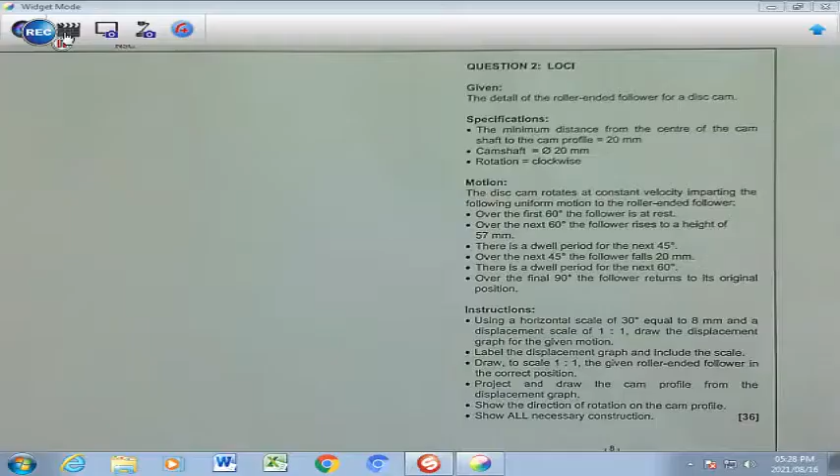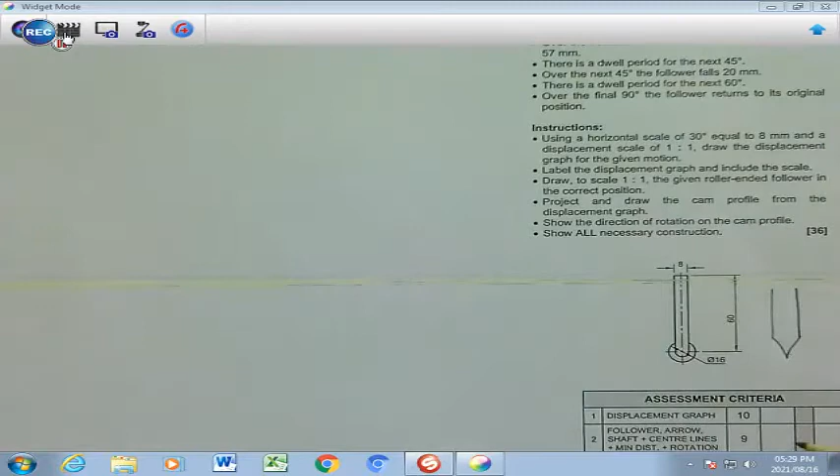So grade 12, we're starting with our first Loci Cam drawing, and this is cam number 1. So what is given to us is the detail of the roller follower, and I'm going to underline roller follower, and I want to take you down to the actual roller follower that you've seen. So we were previously exposed to sort of a wedge-ended follower, which was done in grade 11, but now we are busy with a wheel that's attached to this follower.

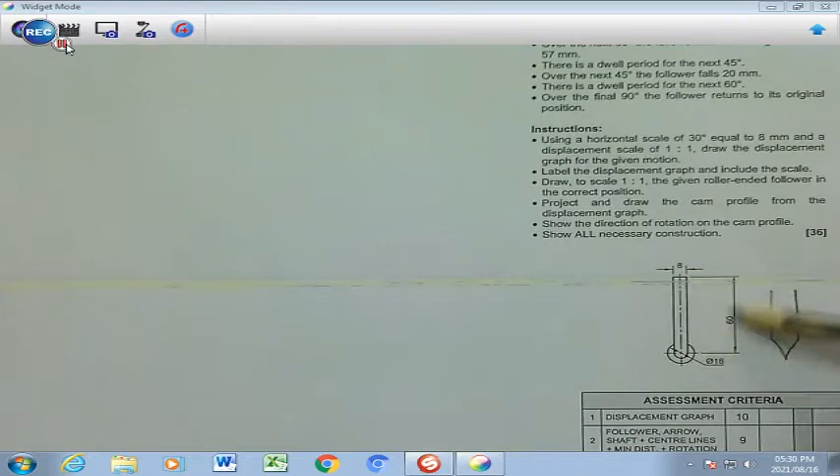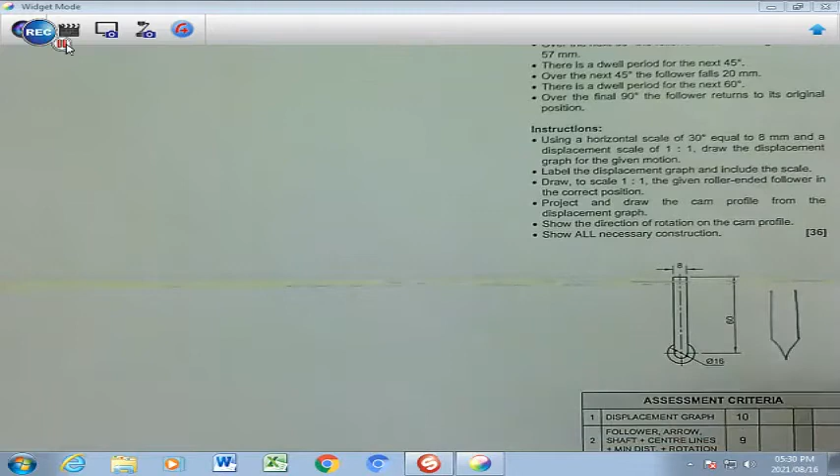So the first instruction is going to be to take all this information which you have here, the thickness of it, which is 8, the height of the follower, which is 60 from the center to the top, and the actual wheel that has a diameter of 16, is to basically redraw this as your starting point and your step 1 in your completion of the cam drawing.

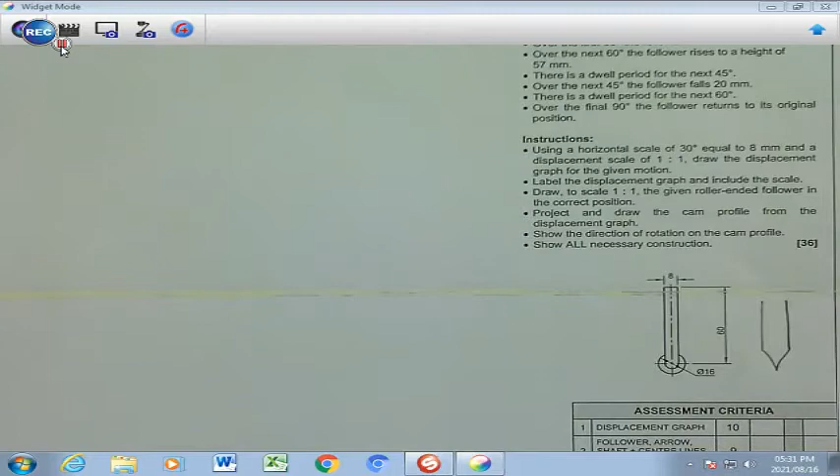So what you are going to do is basically to find the center of the page and to move slightly off center, which I'm going to show you exactly where to start. And to give it a broad explanation, I'm also going to just sketch it for you, and then I'm going to do it with drawing equipment. So as I mentioned, this is your half vertically, and then this is your half horizontally.

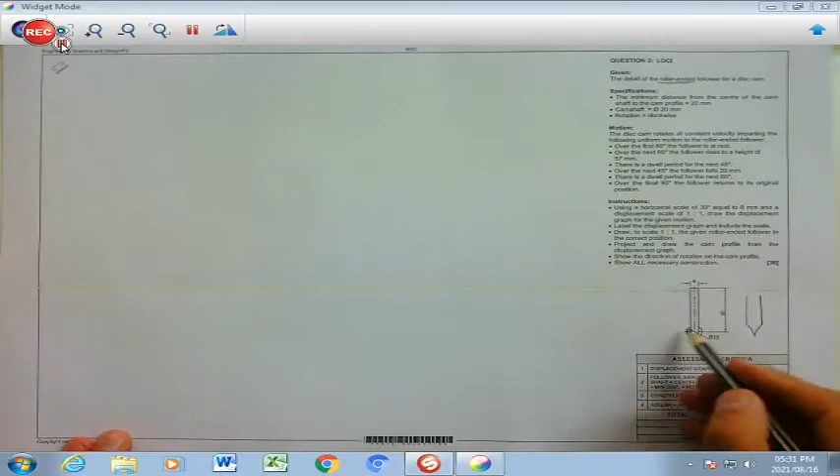So basically I'm going to take that information and start around about here, where I'm going to draw my circle, which is 16 diameter in my center, and then I'm going to draw basically a line in the middle here and measure off 4 and 4 on both sides, which is going to be like that there, and then I'm going to put that semicircle in there and cut that off at 60, and then I'm going to darken that completely like that, and that's my first part which I'm going to draw around that sort of center which we have there. So if you can draw that as step 1, let's do that first.

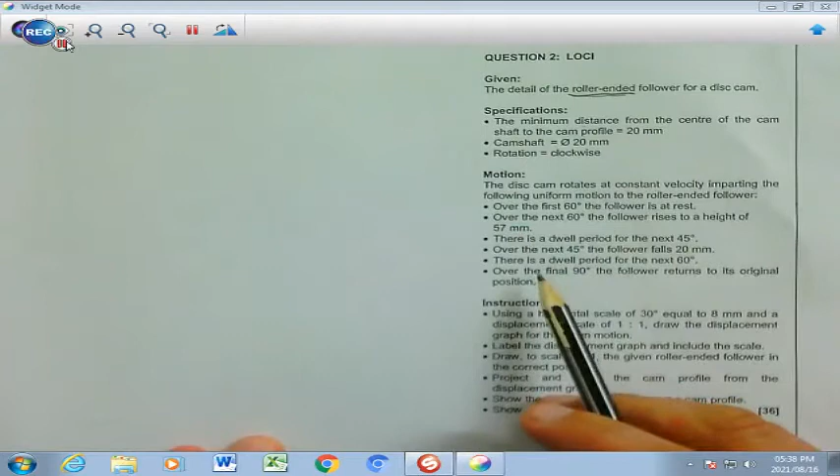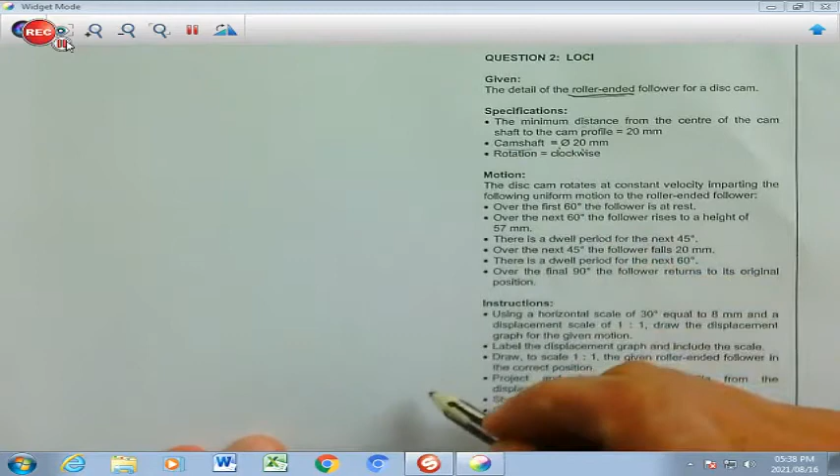Now we're going to look at the specifications, and they ask that the minimum distance from the center of the cam shaft to the cam profile should be 20 millimeters. The cam shaft itself must be 20 millimeters in diameter, and the rotation will be clockwise. So basically what that means, the minimum distance, so if you go over to your sketch, from this bottom part of the roller follower, you are going to measure down 20 millimeters, and then of course that point is where you're going to create your entire center, and everything is going to revolve around that specific point over there.

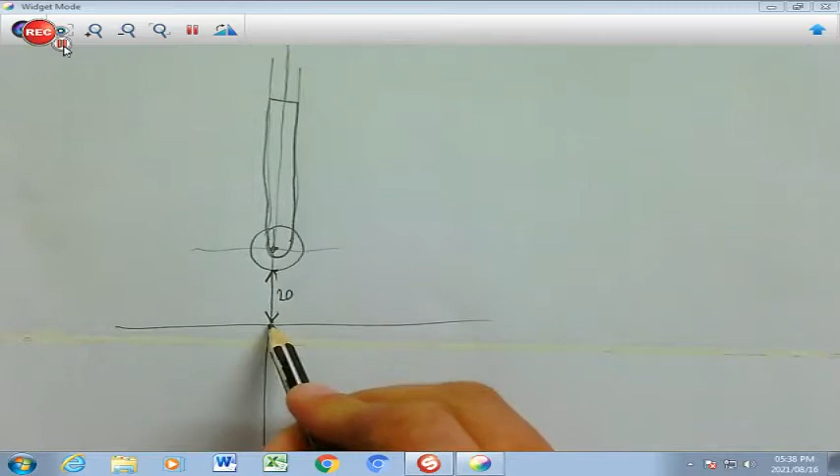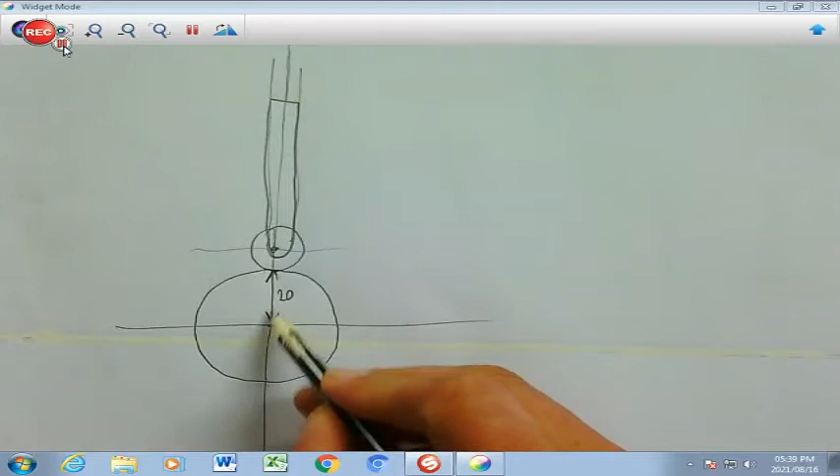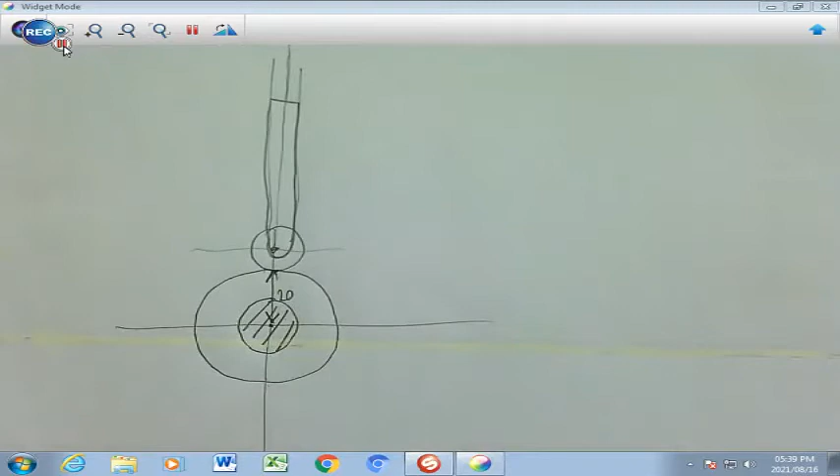And then you will take your compass from this point to that point and draw this minimum radius that you will see there, which is the minimum distance, radius of 20, but that would be 40 in total for your diameter. And then of course they speak about a cam shaft itself, and the cam shaft itself should be 20, so you're going to measure up 10, or you're going to take your circle template of 20 diameter to draw the cam shaft, and then you're going to hatch that part over there to indicate that that is the cam shaft. Let us do that quickly.

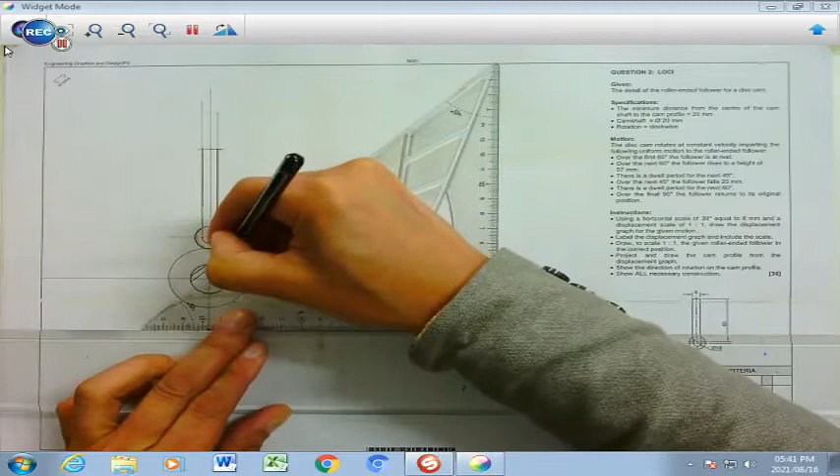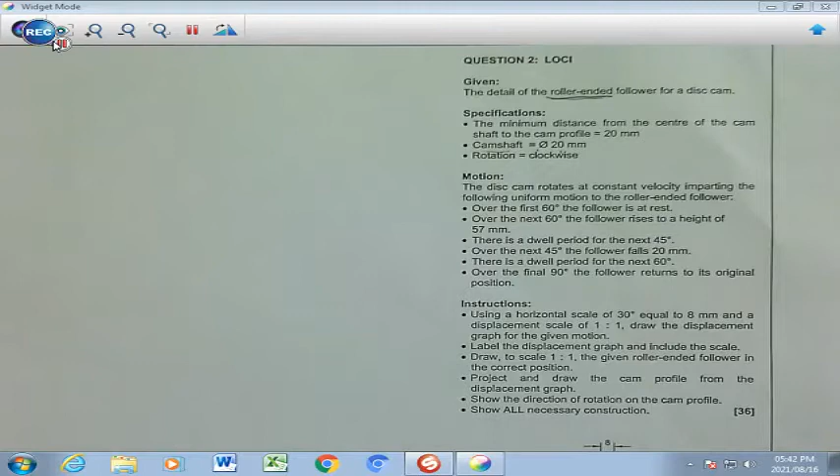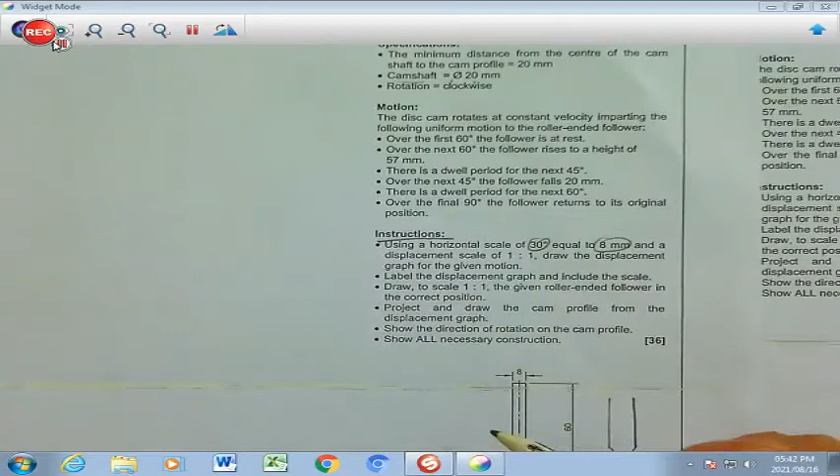So step 3 is where we are going to be working on our cam displacement graph, and we go directly to the instructions where it says that you need to have a horizontal scale which is along this side of 30 degrees equals 8 millimeters. That's very important, and your vertical scale is going to be 1:1. You need to label your displacement graph and include the scale. That's very important below the graph. And then you need to draw to scale 1:1 the given roller follower in the correct position, which we've done already.

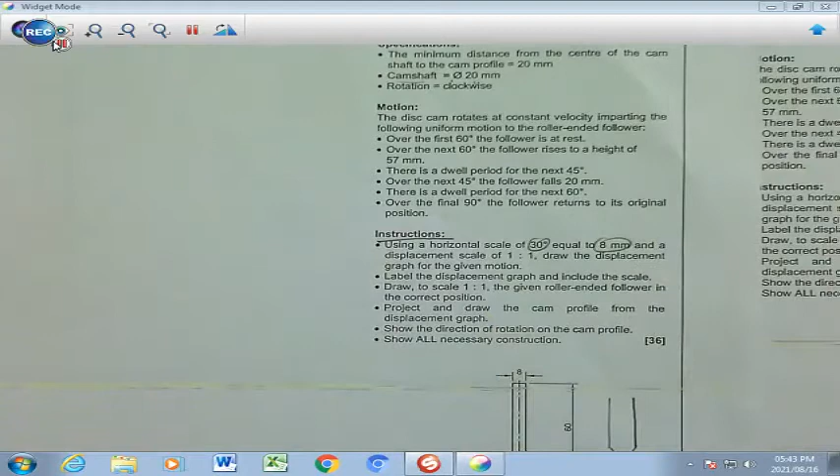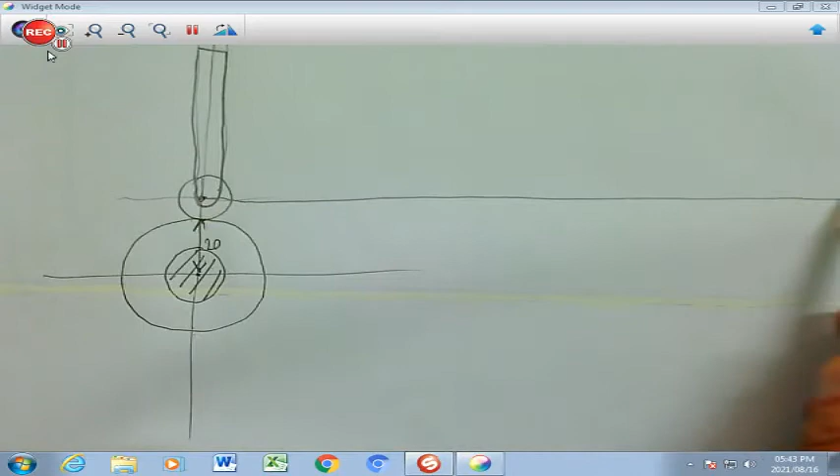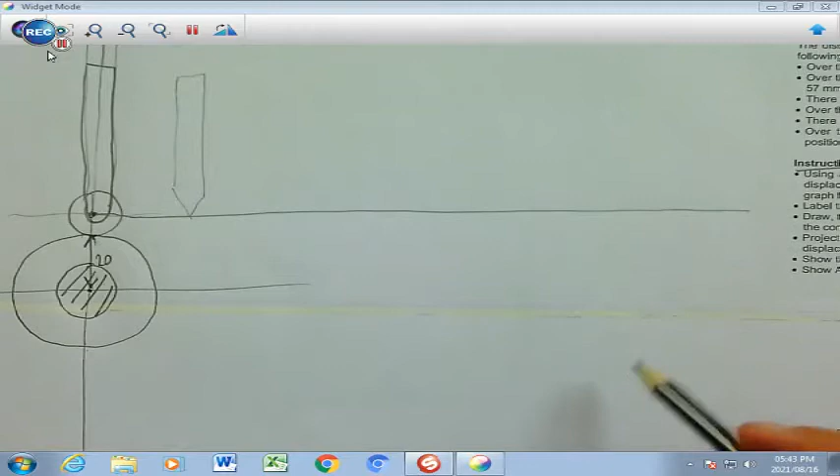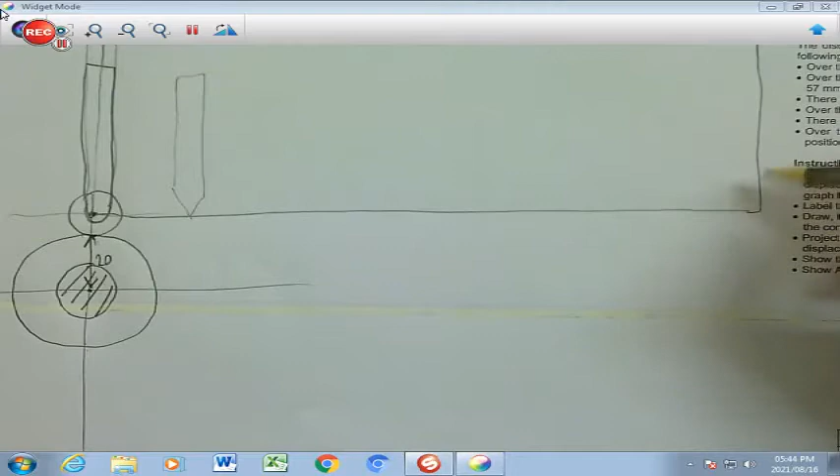So basic explanation, if you go back to your sketch, I'm going to draw a line which basically will derive from this center point here, which is going to form my base of my cam displacement graph. Previously we used to have the line drawn from the tip of the wedge-ended follower, but in this case it is going to be the center of the roller follower, where that becomes the base of your cam displacement graph. You're going to take it as far as possible close to the instructions, and then you're going to draw a line up which is basically perpendicular to this line, and that point there is going to be your 360 degrees.

And then you're going to measure from here 8 millimeters, because that's going to be your distance for 12 points on your displacement graph. I normally measure 1 point, and then I take my compass and open it up at 8, and I will have the respective points cut off on here. And there will be a number of points which I will have on here: 1, 2, 3, 4, 5, 6, 7, 8, 9, 10, 11, 12. There should be 12 gaps, and then I will project all my lines up like that there,

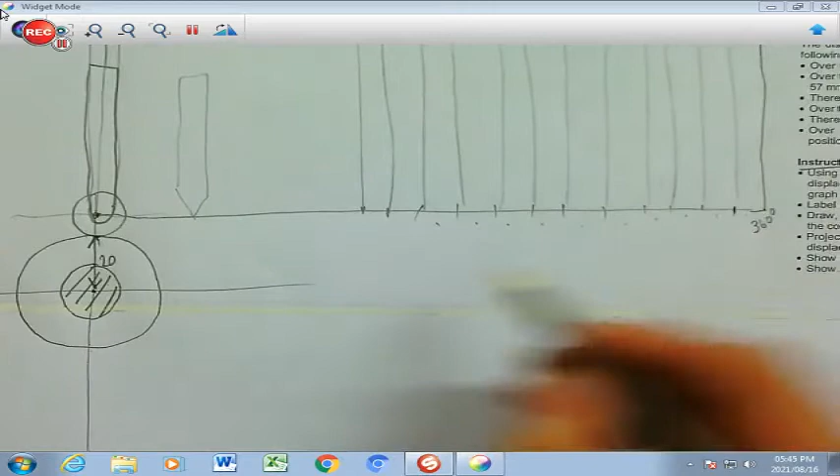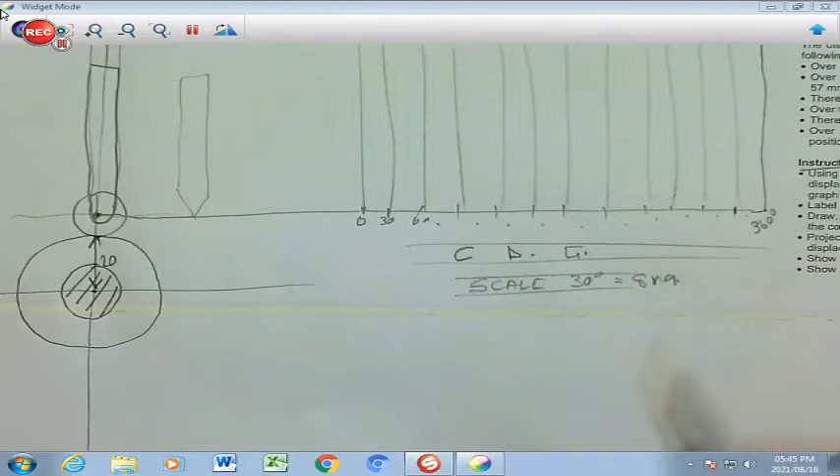vertically up, and then I'm going to label it 0, 30, 60 and so on until I get to 360, and below that I'm going to print cam displacement graph, and I will have the scale as well of 30 degrees equals 8 millimeters. So that's what I'm basically going to do with step 3.

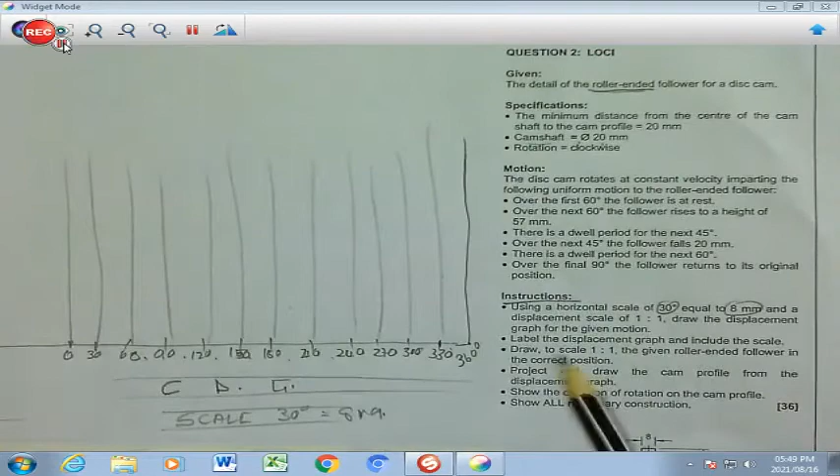So step 4, grade 12, is where we are going to plot the graph using the motion bulleted points here. And it says here that the disc cam rotates at constant velocity, imparting the following uniform motion. Now, very important, uniform motion means absolute straight lines, as you will see unfold in this graph.

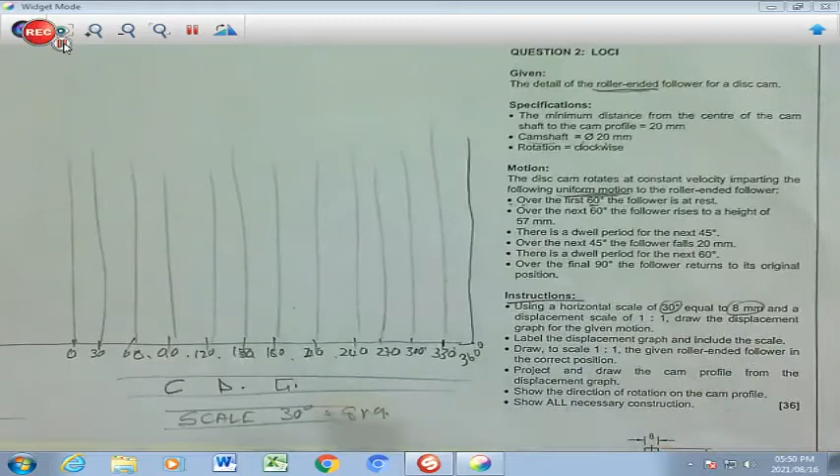If you look at the first bullet, over the first 60 degrees, the follower is at rest. So 30, 60, that means it starts here. You're going to draw a dark line from there to there. There's no movement up or down, it rests.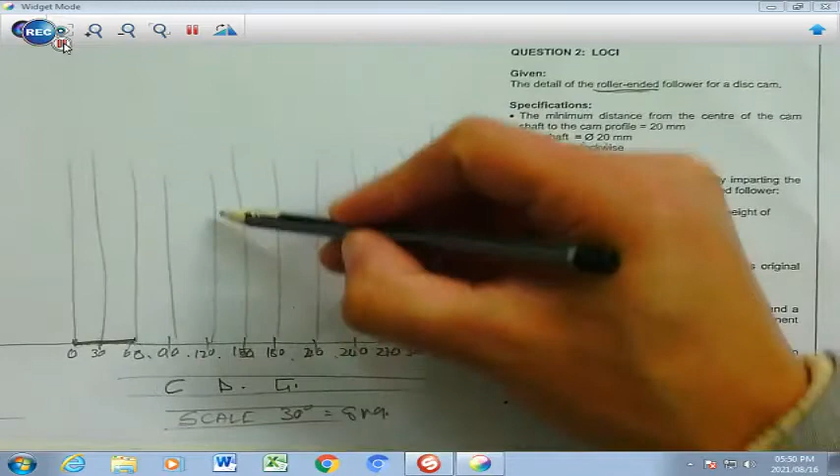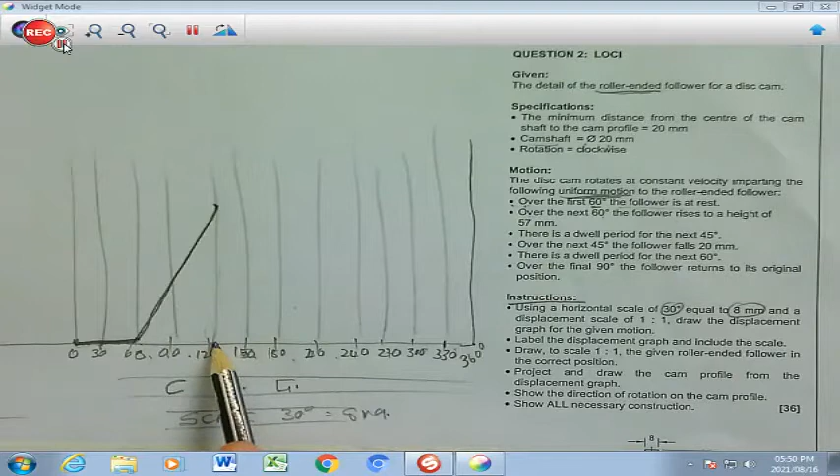Over the next 60, which is from 60, 90, 120, the follower rises to a height of 57. So for these two, it rises to 57. So you're going to measure up here 57. So for example, 57 is there. And it will jump up from this point right till there, which is the 57 point on that 120 degrees.

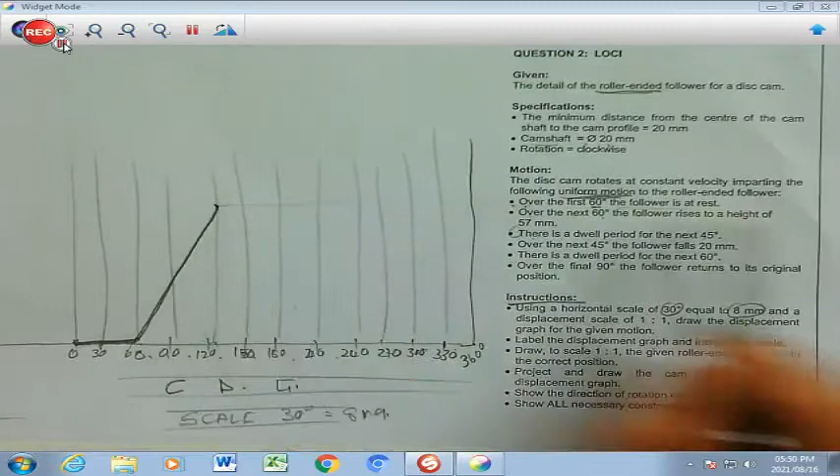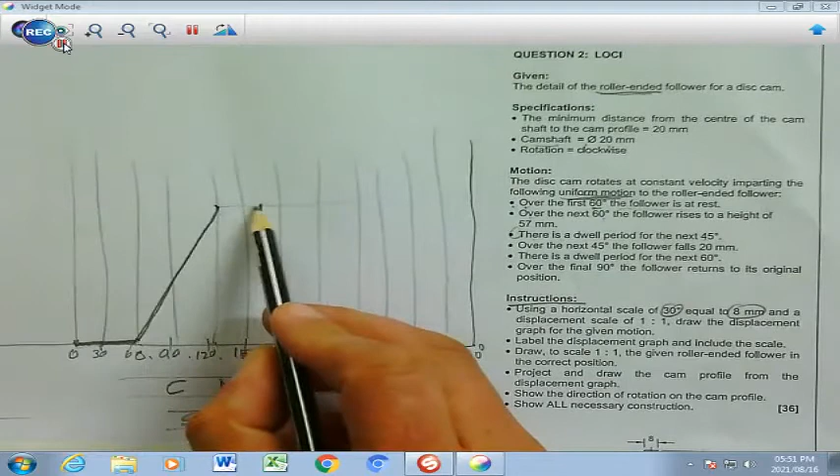Then it says further, bullet point number 3, there is a dwell period for 45. Now the dwell period means it's going to go straight, so it's 30 and half of this is going to be 45, in between 150 and 180 degrees. So you've got to mark it perfectly in half, which is going to be 4, because the entire block is 8 here. So it dwells still there.

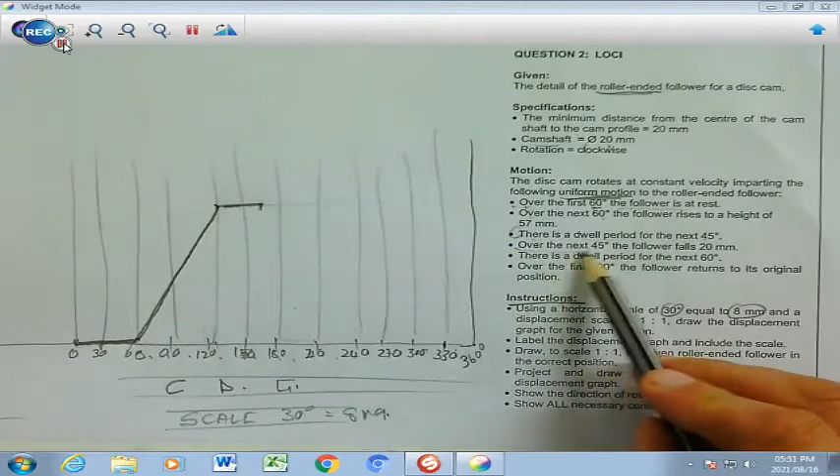And then bulleted point number 4, over the next 45 the follower falls by 20, so it's going to go 15 plus 30, that's going to give us 45. The follower will drop by 20, so you're going to measure down 20, that's going to be your 20 over there.

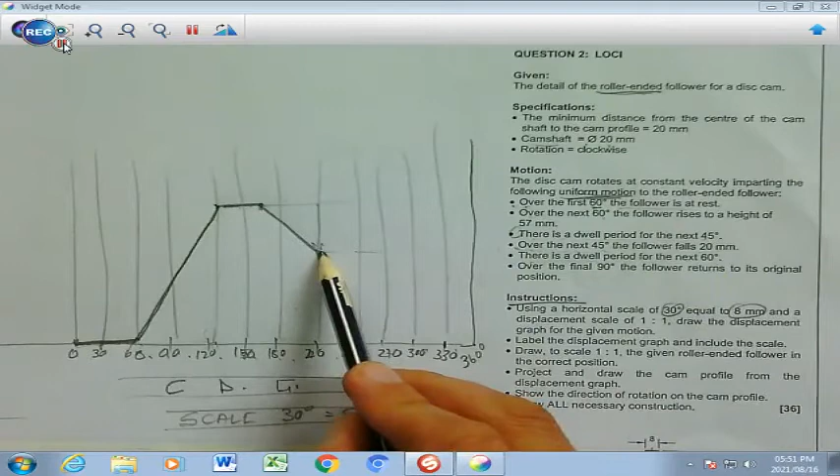You will drop. The next bulleted point, there is a dwell period for the next 60, so it's 30 and another 30, which gives you 60. No movement at all, it goes straight.

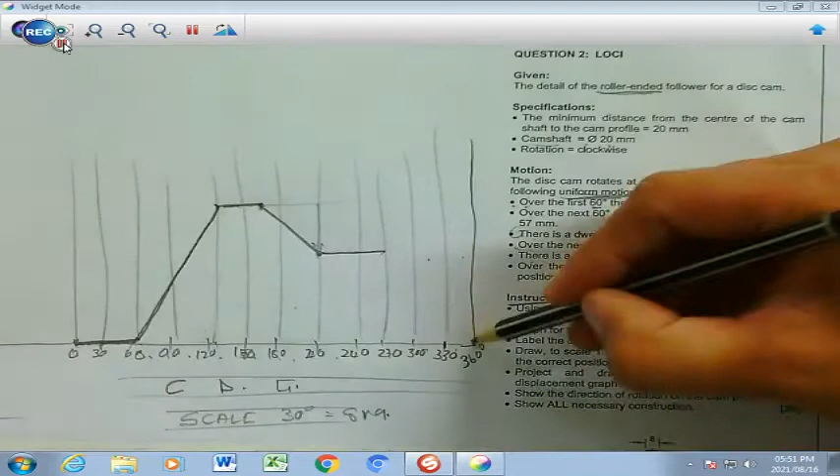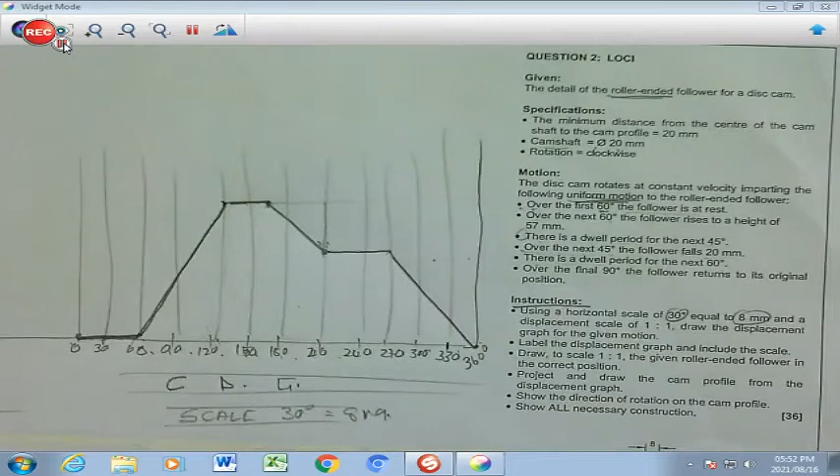And the final bulleted point says over the final 90, 30, 60, 90, the follower returns to its original position, which is there, meaning that 360 and 0 would be the same point. So it goes down straight until that point there. And that is what I'm going to do in step 4, using my T-square and my set square and all my dimensions that are given.

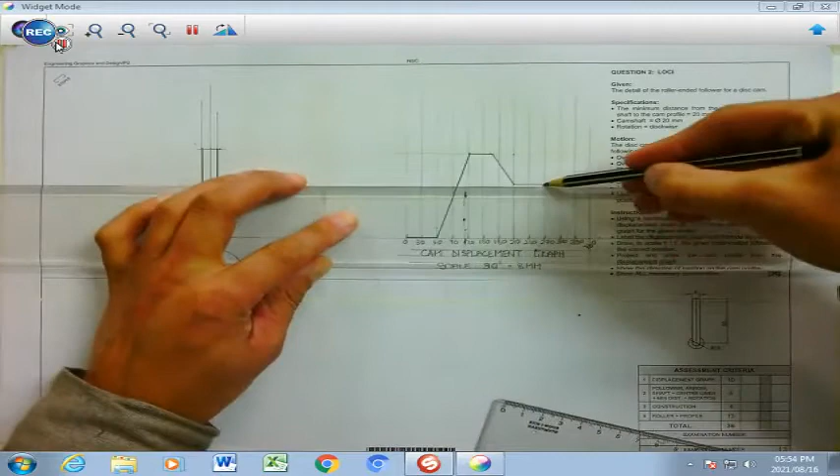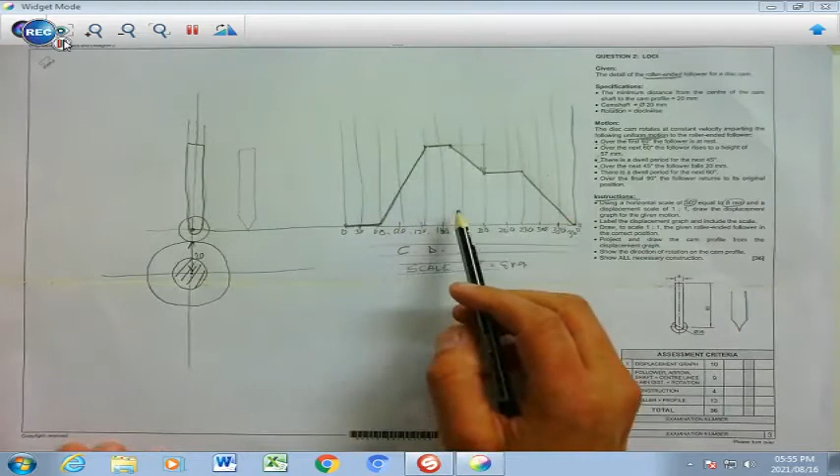Step number 5, learners. I've constructed my cam displacement diagram, so I'm going to set up the construction for my cam profile, where my cam profile will be constructed from the information that I have here in my cam displacement diagram.

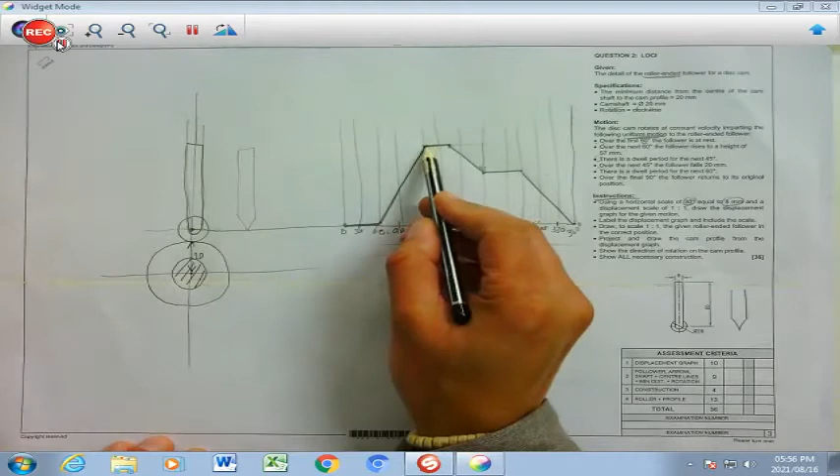So the first thing that I'm going to do, if I must sketch it, is I'm going to have a maximum radius. So from this point I'm going to project over with my T-square, and then I'm going to take my compass from here to there and draw a maximum radius which is going to look like that.

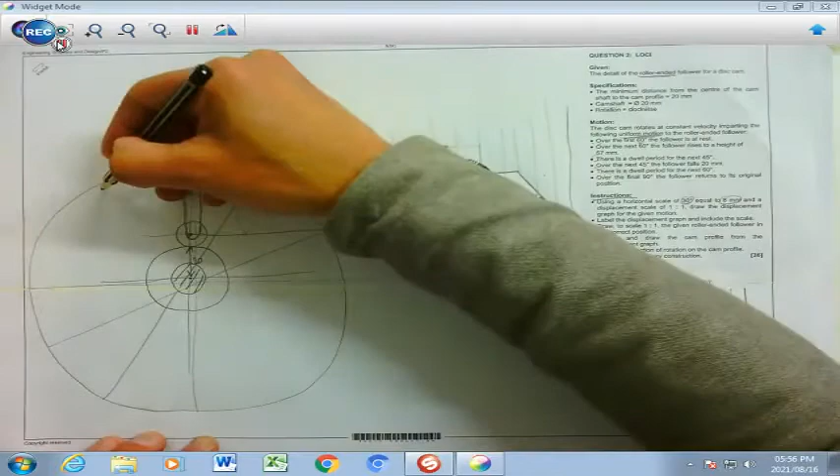And then I'm going to use my 30 and my 60 degrees because I've already created my quarters here. I'm going to draw 60 degree lines and 30 degree lines through the center point like that there, so that I have 12 spaces here which will be similar to the linear 12 spaces that I have here on this cam displacement diagram. Then of course this is going to go in a clockwise direction.

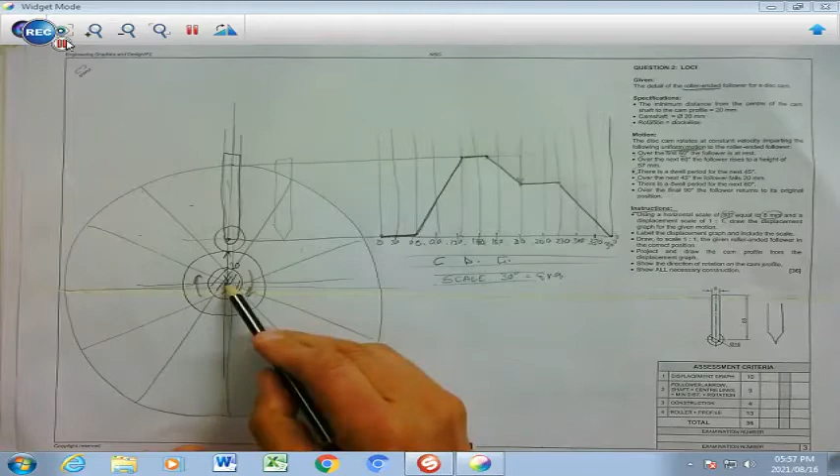Once I have all my lines divided through the center point, I'm going to label each one of these points like I've labeled that there. Keep in mind, if your rotation is clockwise, you start labeling anti-clockwise.

So that's going to be 0 and 360, and then this way around is going to be 30, 60, 90, 120, 150, 180, 210, 240, 270. That's going to be 300, and 330 is going to be there, and ending off with 360. So let's set that up quickly.

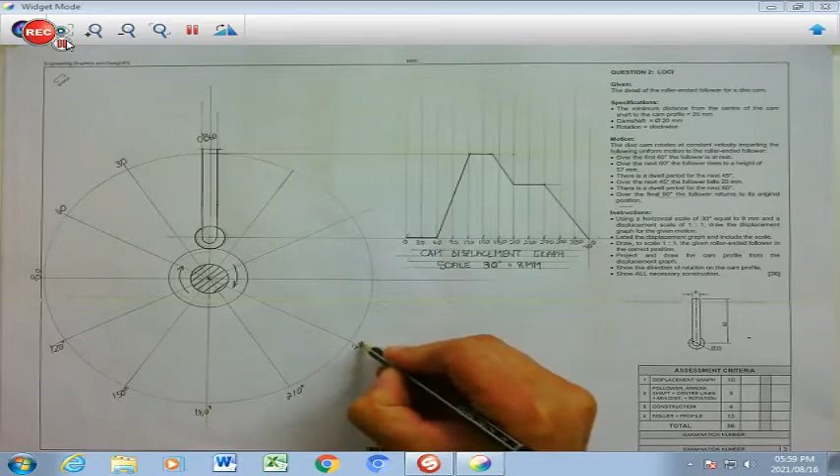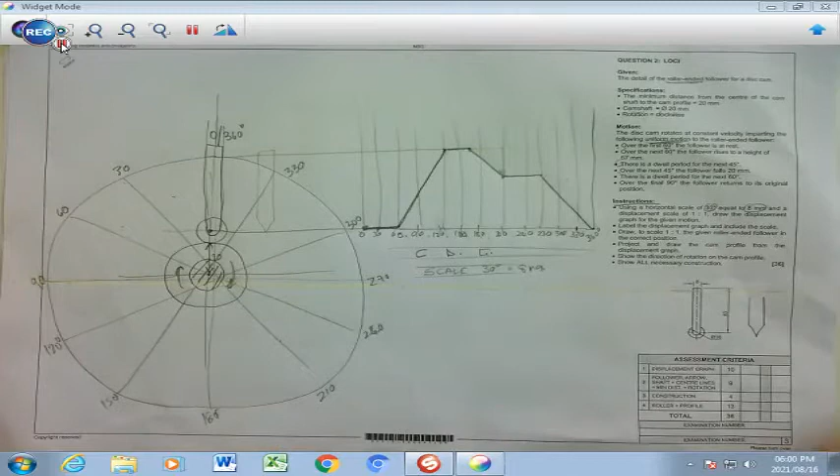We're looking at step 6 during our cam profile construction. We're going to identify all these spots that are on our degree lines, and I'm going to highlight them in a specific color, which is red. All of these points on the degree lines. Remember, there's an intermediate point here as well between 150 and 180. So we're going to identify all those points clearly.

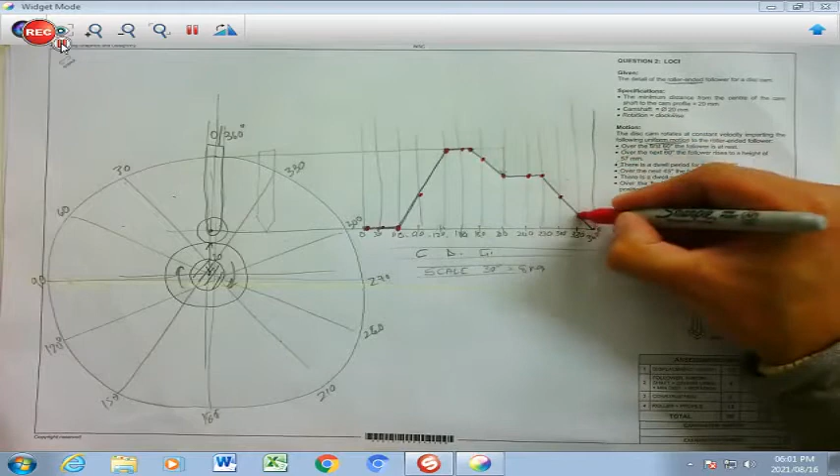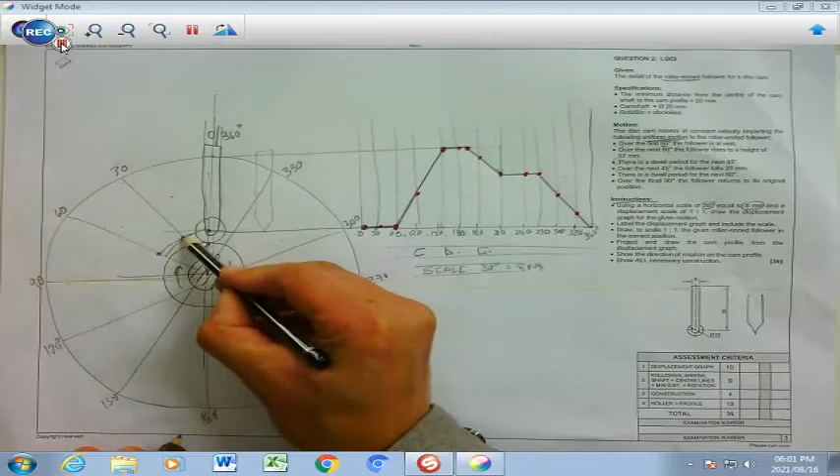So what we are going to do is we are going to transfer those points on here and use our compass from the center point to transfer that onto the respective points, which is going to be there and there. So that's going to be the 2 points, 0, 30 and 60.

And then we're going to bring that across, and we're going to transfer that onto this 90 point, which is there. And then we're going to transfer that way on the outside to the 120 point. Then there's a 150 point on the same line.

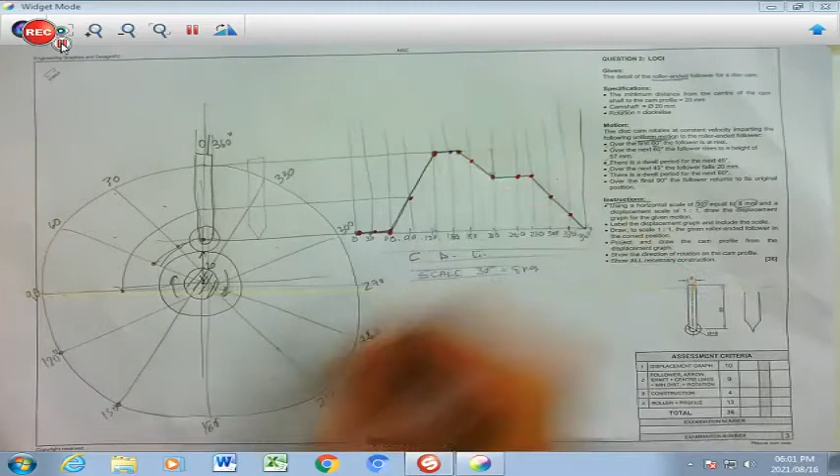And then in the middle here, how are we going to get the middle? You're going to take your compass and you're going to arc like that, and get the center here and draw a line through that center. And that is going to be 165, which you are going to have right there as well, 165.

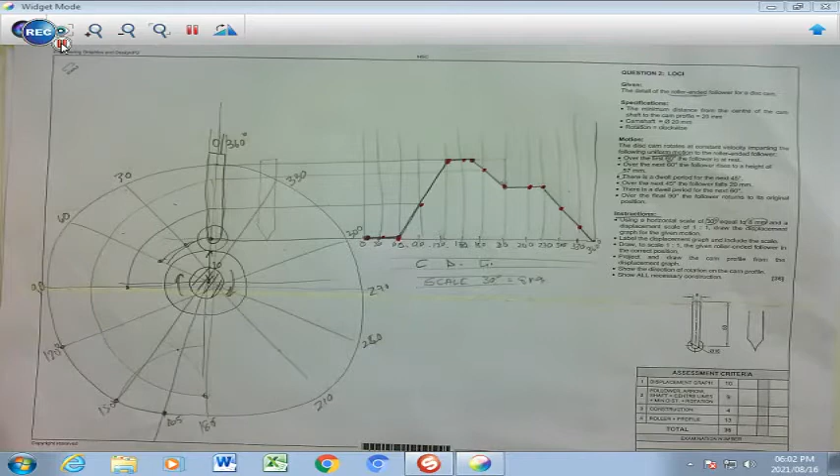And then of course we're going to drop down like that to 180, which you are going to bring to that point over there. And so you're going to follow all the points and transfer them from the center onto the respective point corresponding with the degrees that you have in your linear cam displacement diagram. Let's do this and watch carefully how it's done.

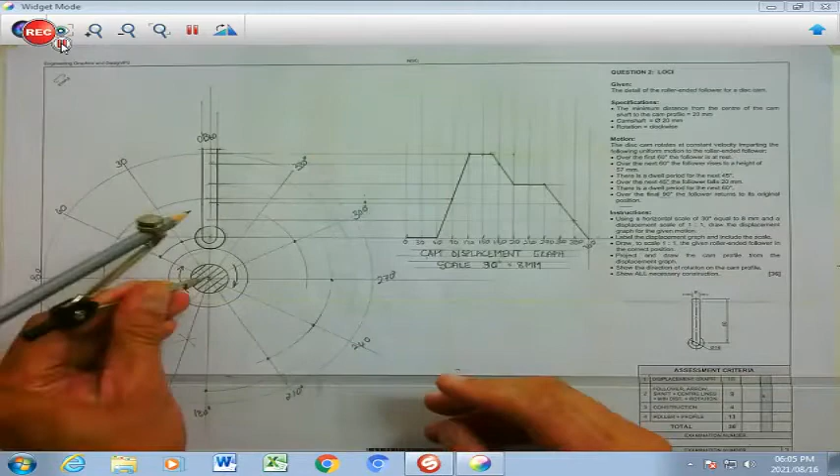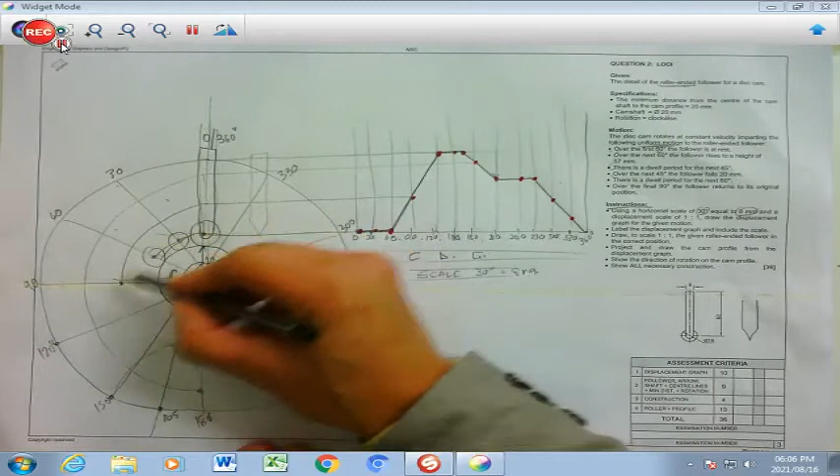And the final step in the completion of the cam drawing, we will take our circle template, and this circle will be drawn around each of those, reflecting the roller follower going right around. So we're going to have those 16 diameter circles nicely centered around each of the points, from 0 to 360, as well as the intermediate point.

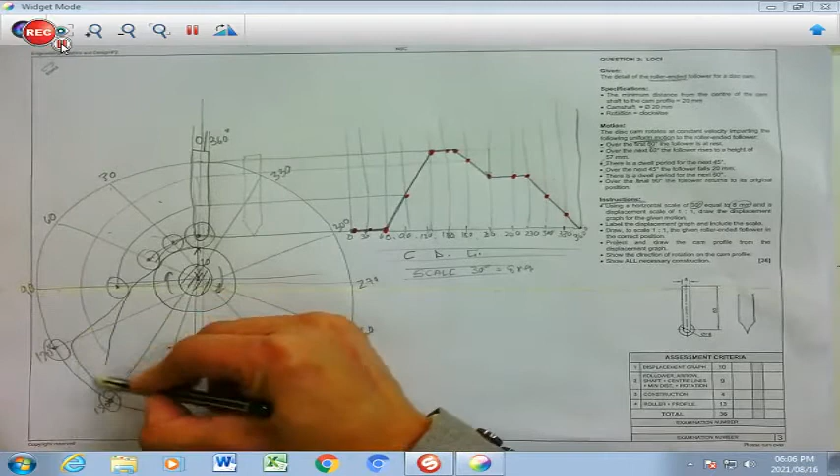And then of course we will use our pencil just to draw a line freehand, touching the bottom part of your circle, basically forming the cam profile. Watch carefully how it's done.

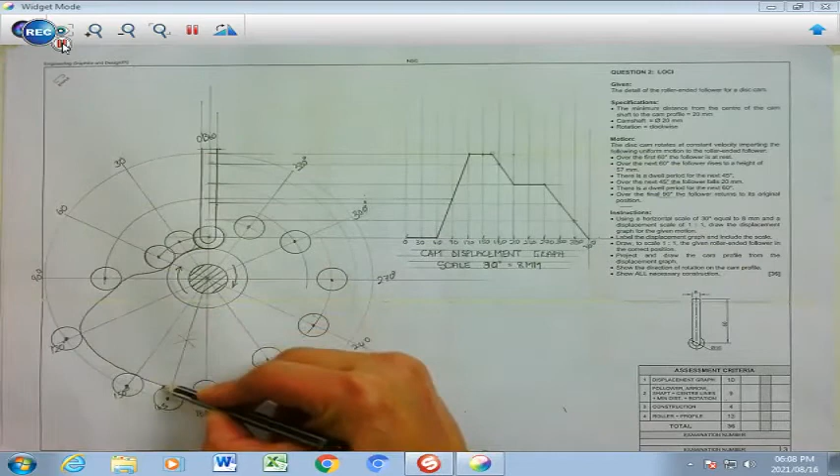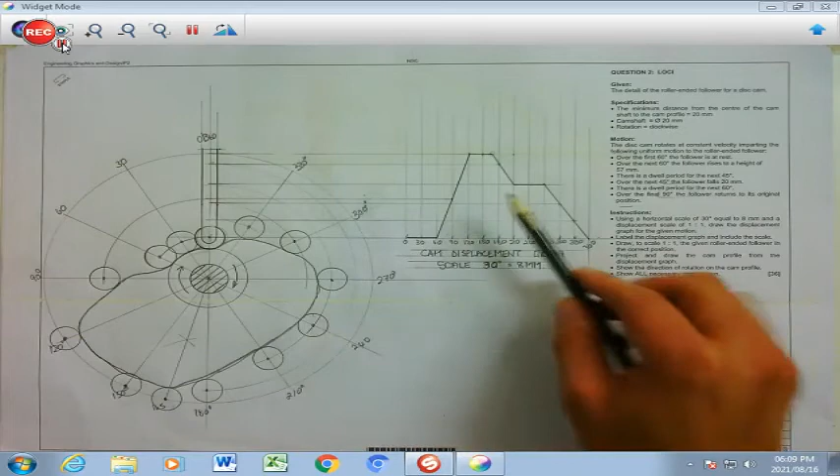That, my dear boys and girls, completes the cam drawing 1, consisting of your cam displacement graph with a scale of 30 equals 8 millimeters, and then converted to a cam profile which basically has been highlighted like that.